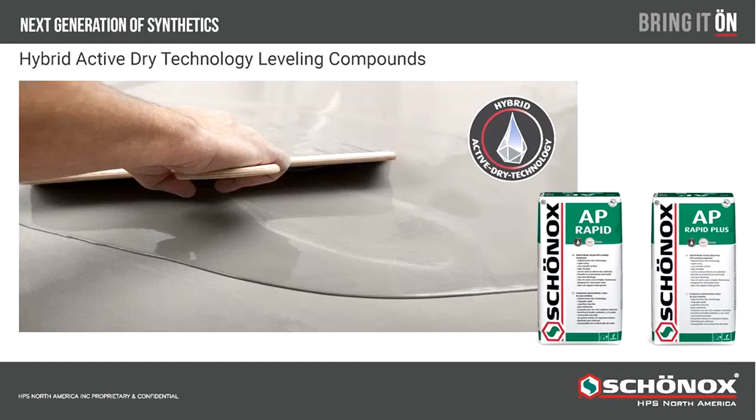But Schönox has also been known for technology, driving new products in the industry, and we're very excited about bringing you one today. And this is our new hybrid active dry technology self-leveling compounds called AP Rapid and AP Rapid Plus. This is something that's been in development for several years, and we are eager and excited to see how these products can be used here in the U.S. market.

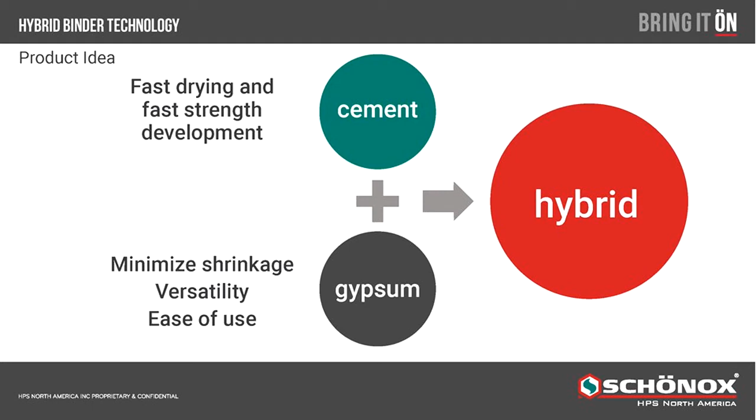So we've been listening to our installers in the field, and they like the fast drying techniques of cementitious-based products, and they also like the non-shrinkage ability of our synthetic gypsum compounds. They were asking us, can it be possible to combine both fast drying and non-shrinkage to create a true hybrid? So that has been something that's been in development for several years, and we have now had success with that and are eager to introduce you to our new system.

So what we're doing, we will actually combine a calcium aluminate cement with a synthetic gypsum system, and also some polymers and some additives to help steer and control the binder system. This produced a 100% pure hybrid product. So now we can combine that initial fast setting of cement and that non-shrinkage of gypsum. And we have a system which is called hybrid active dry technology.

So that is the next level or the next generation of synthetics. 100% active dry technology offers the benefits of both worlds, combining versatility and strength and also durability of synthetic gypsum and a fast-drying cement. So normally in a cementitious product, the water is absorbed through hydration, and that produces shrinkage. And when you're looking at a gypsum system, it dries by evaporation, which gives you the longer dry times.

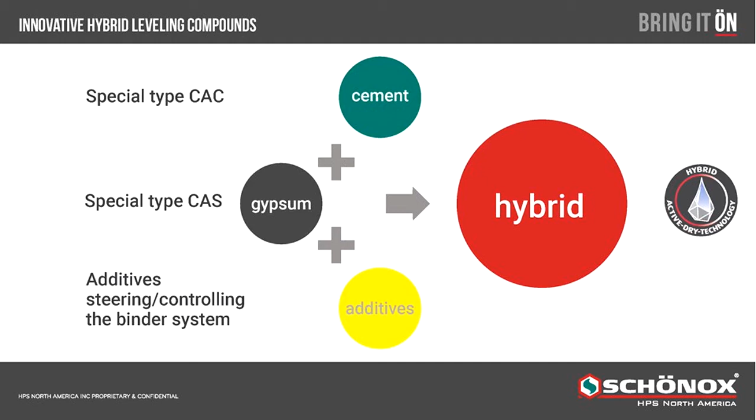This hybrid active dry technology system actually takes the free water within the system and combines it to create the product itself. So we are looking at something that will not absorb the water like you would with shrinkage of cement and does not expel it like you would with a gypsum system, a true hybrid active dry technology system. So we're getting something that's very easy to mix. This can be barrel mixed or it can be pumped.

Very good flow properties. This is a high flow rate material, very smooth, easy to install, has some good products in it that will give you some healing capabilities of this material. We have a long pot life, and that combines even with faster strength development. So we have it developed that gives you enough time to get it placed and get it smooth, and then the strength development happens very quickly.

There's low risk of overwatering this particular product because it is a hybrid active dry technology. It's taking the water that it needs within the system, and that is it. So we're actually taking free water and using that for the hydration process. It's very versatile for our job site conditions. So those critical substrates that we've been dealing with, the asbestos floor tile, the sheet goods, those type products can be used with this type system, so we don't have to worry about demolition. We can still go over them like we would with our synthetic gypsum products.

It's a very homogeneous surface when wet and after drying time. You'll see that when the cure process happens. Very easy to pump. We've had some very good success this year with pumping these two materials. Flows very well for those type pump systems. High surface hardness. We're getting 5,800 and 6,200 PSI compressive strength.

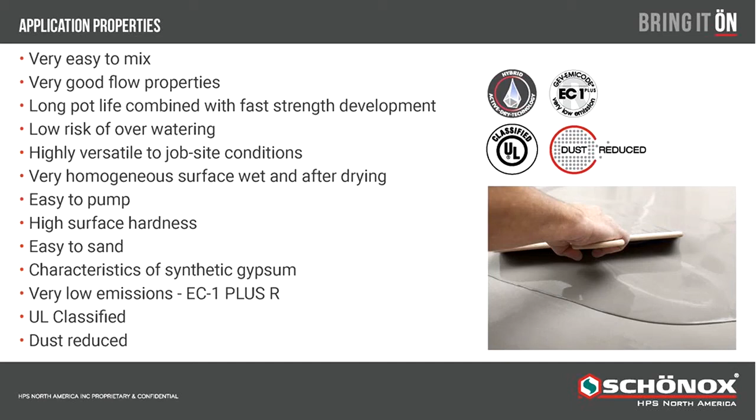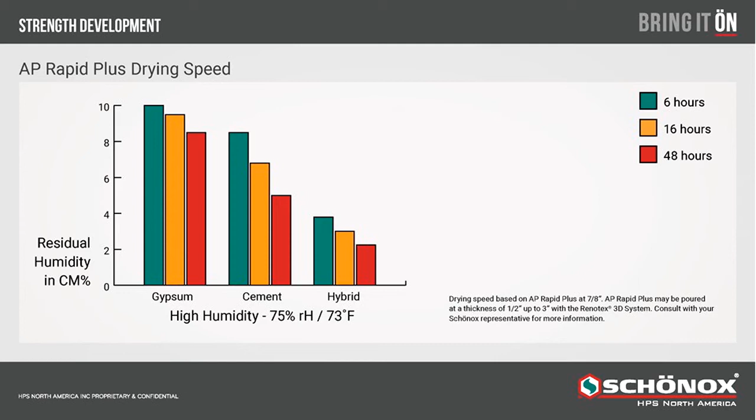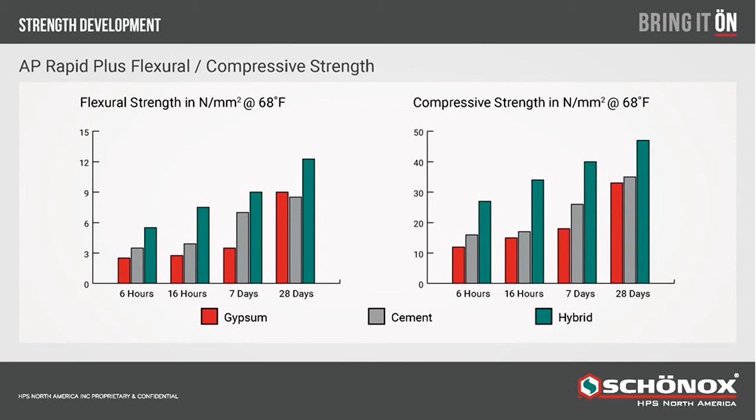So look at your flexural strength and compressive strength as well. Gypsum systems normally take a longer time to get your initial flexural strength, up to 28 days, and continue on that scale upwards. If you look at the cementitious product, same way, but you're also getting a higher compressive strength on the cementitious side. The hybrids that we have get higher flexural strength in a shorter period of time, and also a higher compressive strength in that shorter period of time. So that's giving you easier workability, the ability to go over these critical substrates, and to put your final floor covering on them in a much shorter time frame.

So this hybrid active dry technology, we're very excited to present to you. This is going to open up our markets not only in multifamily applications, but also in retail, healthcare and education markets. Any place where we need that faster turnaround and critical substrates combined into one application. So this is something that we hope you will embrace. This could be our next generation of self-leveling compound materials.

So your AP Rapid is active dry, again, 1/16 to basically 1/2 inch in one lift. This is our traditional 1/2 inch self-leveling compound, ready for floor covering in about 6 hours at 1/4 of an inch; if we go to a full 1/2 inch, normally around 24 hours, ready for placement. We're insensitive to water dosage. Water is not as critical as with some of our other self-leveling compounds. A little extra water in these mixes will not degrade the system because it's actually taking the free water it needs for the hydration process.

Very low shrinkage on this material, so we can go over those critical substrates. We can go over asbestos floor tile, existing wood flooring, sheet vinyl products, adhesive residues, cutback residues, those type of products. We can actually pour this product over that with the primer system underneath. This product is interior use only. It is pumpable. It is suitable for underfloor heating systems.

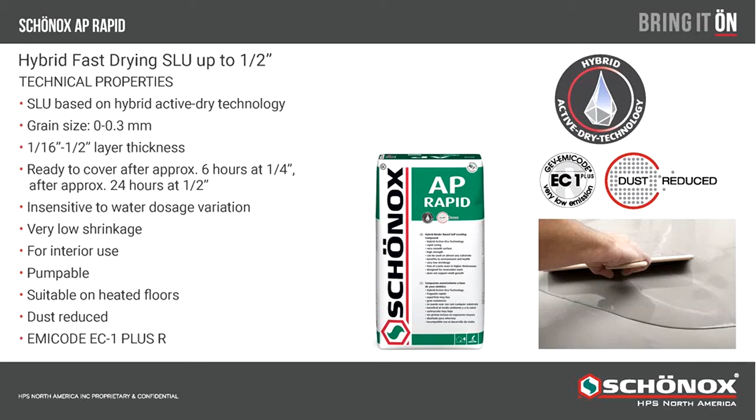AP Rapid Plus is a product that can go to deeper applications. The self-leveling can go up to 3 inches. From 1/2 to 3 inches is normally what we're looking at with AP Rapid Plus. This is eliminating the process in multifamily installations where they are actually removing the existing gypsum systems and then installing plywood and doing a patch around it. That is a very risky maneuver, not only for our risk management, but for the health and safety of our occupants. So this product can actually be installed up to 3 inches to infill those areas on our multifamily applications. So we're ready for floor covering with this product in 16 hours at 1/2 inch and approximately 8 hours at 2 inches.

So we have very high strength gain very fast on this product. We are, again, not worried about high water dosage variations on this one. Very low shrinkage properties as well, and it's suitable for underfloor heating systems, dust reduced, and EMICODE EC1.

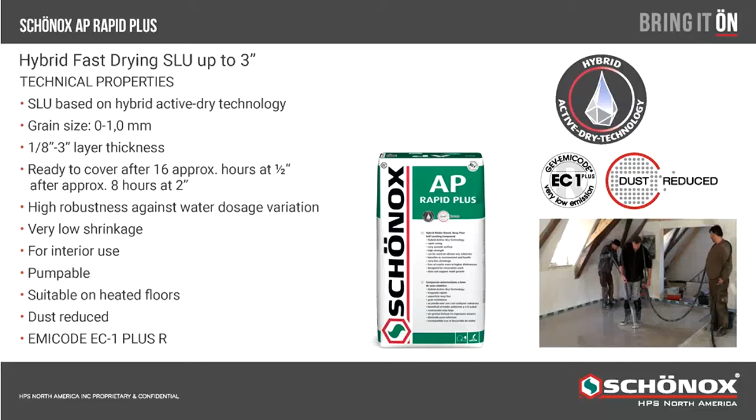This product right here is very versatile, even in our environmental conditions. Climate does not have a major impact on our hybrid active dry technology. The pictures you're seeing on your screen are from one of our original tests that we did in our processing in Germany. This was a pump process, as you guys can kind of see on our screen.

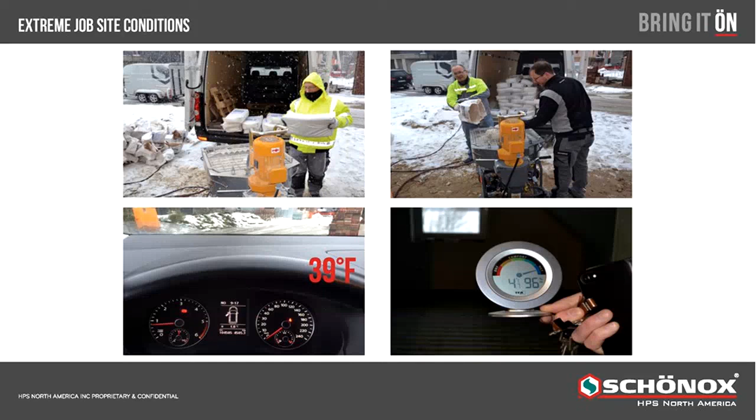The external temperature of this facility was about 39 degrees outside, so very low temperatures. And even at those lower temperatures, we were still able to mix and pour and pump this product into the space with absolute success. So the next slide you're seeing, they clean primed it, laid out the underfloor heating systems, and pumped this material into it.

We're still probably at 41 degrees internal temperature, so we're not getting the high variation, whether high temperatures or very low temperatures. But also keep into consideration humidity. We live in the United States where humidity has a large variation. Low humidity in our western states, very high humidity in the southeast.

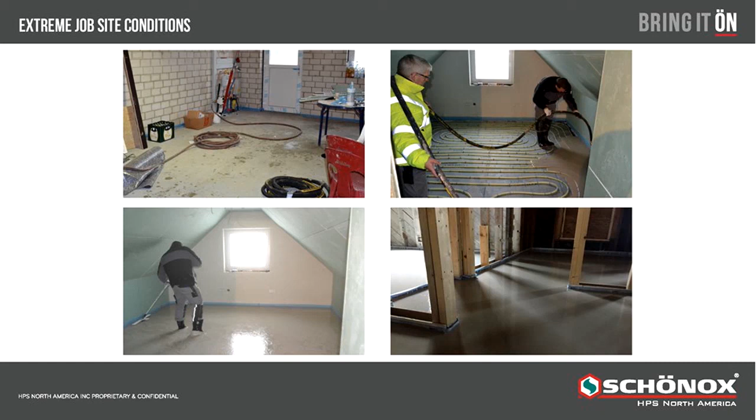So humidity does not affect the drying time of our hybrid active dry technology. So for folks in the southeast putting in a system, if it's a higher humidity, we may have to add extra dry time. This material, again, takes that free water, even with humidity, and we can get drying time still stable within that 6-hour time frame on our AP Rapid. That normally would take additional dry time if you're doing a traditional synthetic gypsum system.

So to recap a little bit, hybrid active dry technology with AP and AP Rapid Plus. Ease of use, we can barrel mix this material. It can be pumped. It is very safe and very sustainable. We do have LEED credits available because of renewable resources and our low VOCs for this product. So any project that you're working on that needs LEED certification, these products do qualify for those LEED points.

Very fast strength development, very early walkability. So if you guys are doing a retail space, we can clean and prime the existing floor finishes and pour our AP Rapid Plus over it. We can have strength gain within 4 to 6 hours, ready for new installation. So same-day installations that we could not do otherwise. So early ready for floor covering, self-curing capacity, very fast drying, very fast setting.

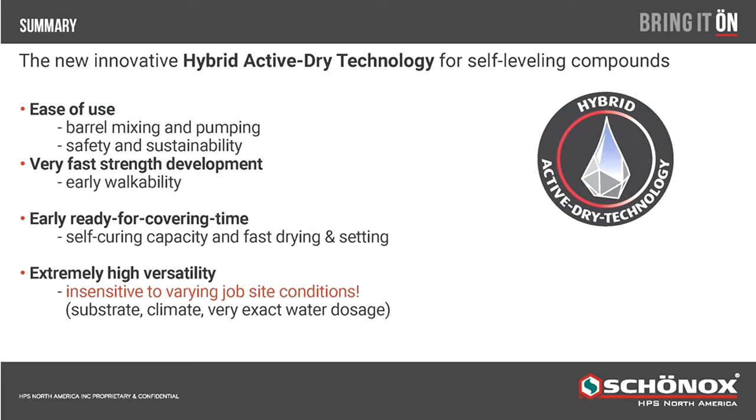And like we said before, it's insensitive to our job site conditions. So substrate temperature, our climate, our humidity, exact water dosage, these are variations that normally would slow down our drying process, even with cementitious products and our synthetic gypsum systems. These processes are kind of eliminated when you're doing a hybrid active dry technology system.

So you take AP Rapid Plus, and we have a full system now for you guys doing new multifamily construction or even some renovation. We have a sound and insulation sheathing. We have a 3-dimensional Renotex. We have our RS50 foam tape and our AP Rapid Plus self-leveling. These 4 products combined give you a full UL rated system for both fire resistance and sound resistance. And it is a self-leveling system combined with the 3D Renotex, which gives you a really uncoupled self-floating system that can be installed in our multifamily applications.

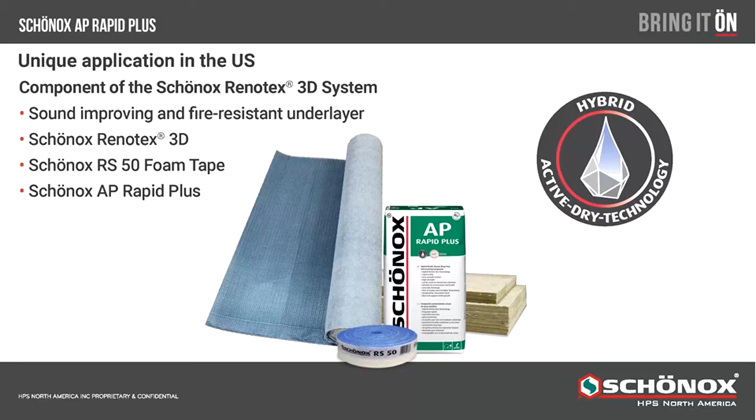So we can put that full system in at a reduced thickness of only 1 inch versus some of the traditional systems that you're seeing in multifamily use today. So this is going to be very important for our new construction. This gives us a very low life cycle cost because of the durability and the versatility of the system. No longer are we putting in traditional systems that will be around 2,000 PSI strength. This is going to be upwards of 6,000 PSI on compressive. It gives you very high versatility on the flexibility as well.

So for anybody that's interested in the multifamily aspect of this product, this is actually being engineered and designed for you. If we put this system in at that 1 inch thickness, ½ inch with your sound and insulation layer, and ½ inch for your AP Rapid Plus with Renotex, we get dry times overnight ready for installation. So no longer are we having to wait an additional 3 to 4 days for this stuff to dry for you to do your installation. So it's going to speed up the actual finishing process of our multifamily installations.

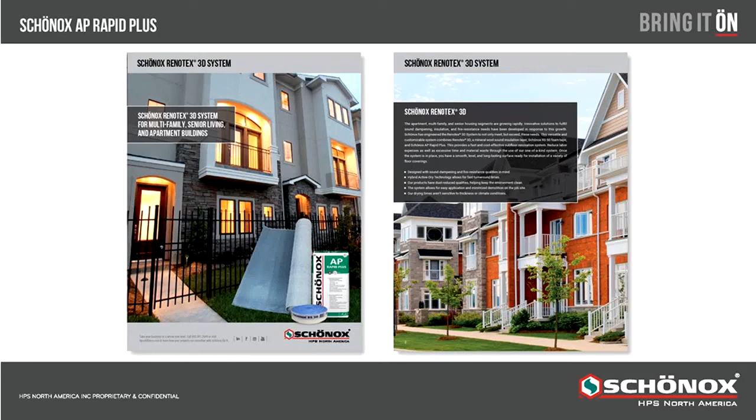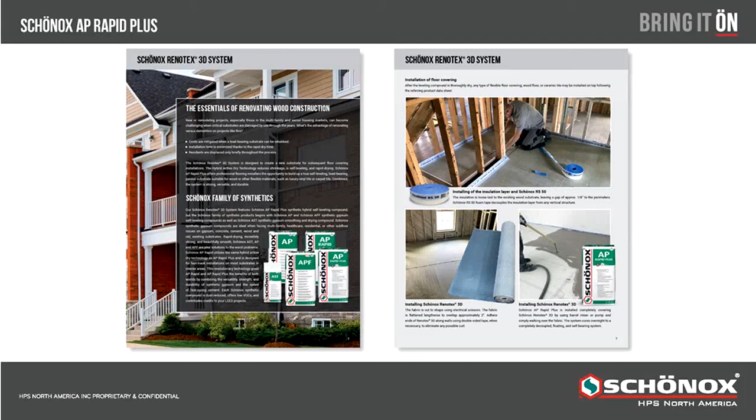It gives you some step-by-step instructions on how to actually install the product, and also mentions our other synthetic systems that can be combined in with our Rapids hybrid active dry technology products. So it's suitable for any type of construction.

Another good feature of our 3D Renotex and our AP Rapid Plus: if you have a slab that is contaminated with grease, oil, those type compounds, normally those are your bond breakers. We can actually take this product, our three-dimensional Renotex and our AP Rapid Plus, combine that with a polyethylene foil, put that on the slab and do an uncoupled system. So we can actually do a non-bonded, three-dimensional reinforced system that can go over these type products.

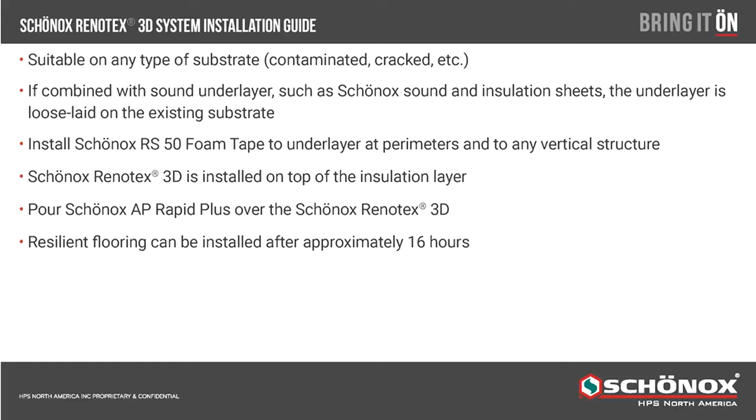So what does that mean for us? Again, some risk management. If in an event that we have a deterioration of the substrate underneath in a fire in a multifamily application, even at 1/2 inch thickness, it is self-supporting. So it would give the occupant a little extra time in order to vacate. So that is giving you some great properties that you can give to your end users to use this three-dimensional Renotex system with our AP Rapid Plus and our sound and insulation sheeting.